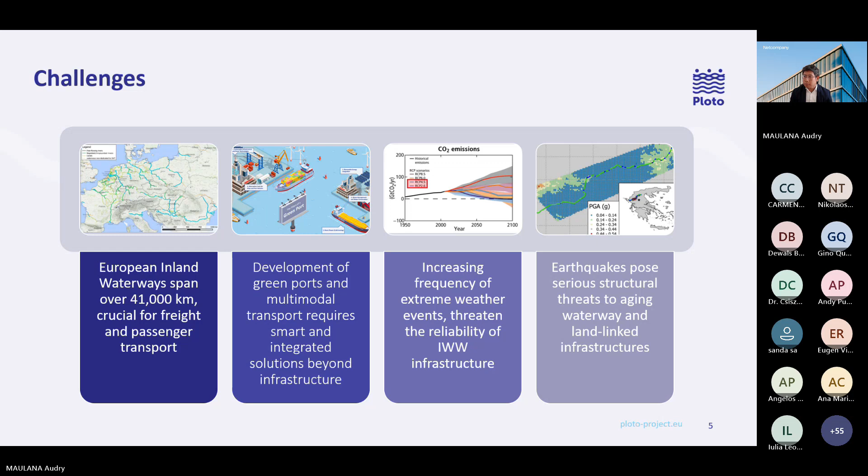Based on these challenges, we aim to address multi-hazard risk understanding, smart prevention and preparedness, as well as faster, adapted, and efficient response. So we develop a new integrated system to support operational and strategic adaptation and mitigation measures by better absorbing and efficiently recovering from climate change impacts.

The overall goal of the project is also to increase the resilience of inland waterways. We do this through a specific methodology that we use.

PLOTO is a very much user-driven project. That's why we designed our methodology, designing the pilot activities together with our end user partners. We adopted an agile development and startup mentality, so we're not afraid of breaking things along the way - we learn from our mistakes - and then we produce early prototypes validated with stakeholders in intermediate schedules for continuous amelioration, and we engage an interdisciplinary team of experts.

This is the modular design that PLOTO adopted. Coming from the hazards I mentioned previously, such as drought, flood, or storm, we take a look at our assets, which is the inland waterways, but we also consider the link infrastructure such as railway, highway, and power, and we create a network from these assets.

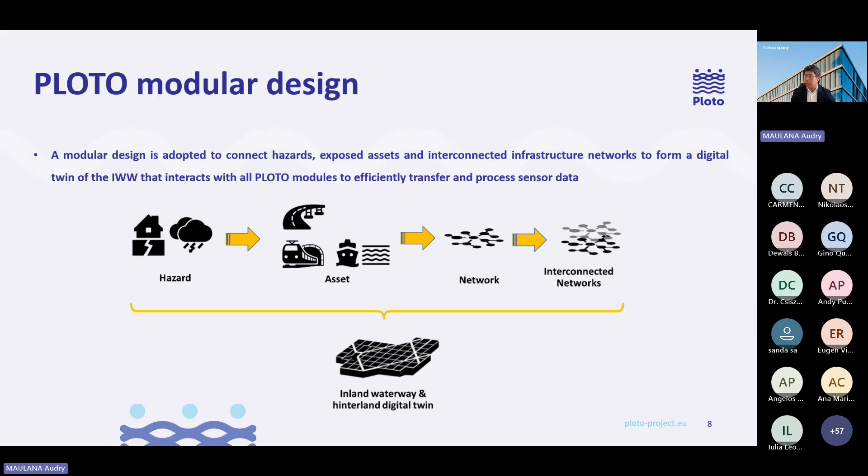I'm not going to go into detail about the methodology of each part of PLOTO - Professor Vamvatsikos will go into more detail in his speech later. But this is basically our methodology of PLOTO. We use a lot of computer vision and machine learning techniques, as well as middleware, data fusion, digital twin, and a common operational picture.

So the use cases and scenarios. I've talked previously about our use cases, but we have 3 use cases in PLOTO. We perform extensive tests in 3 different demo sites - each one has similarities, but also a lot of differences between them.

For example, case study A in the Danube area - this is a collection of smaller ports. It's not just one port, there are about 6 ports in the area, including the waterways and inland ports.

In case study B in Budapest, this is a very interesting case study because it's connected to the railway. This is an inland port and it's connected to the railway.

And then in case study C, in the region of Wallonie in Belgium, this is a very highly urbanized area, in Liège. This is also another type of use case that we want to use as well. We're going to hear more about the case studies in a later section of the webinar.

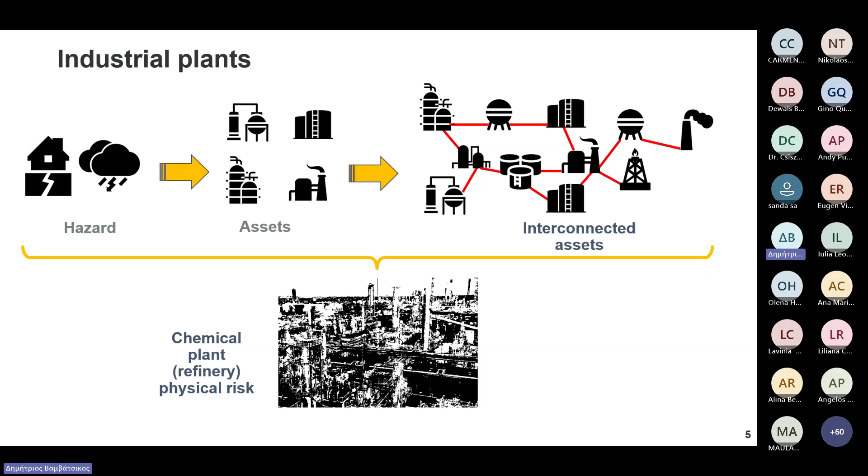Or you can have an industrial plant—again hazards, assets, different types of assets, similarities, dissimilarities. You interconnect them into a system, so you go from asset to system, put them all together, and you get the physical risk of an entire facility.

Same for infrastructure networks. You start from hazard, from assets to network of assets, to interconnection of those in a transportation system. And each time we try to do this, it's a new challenge, a new way of interconnecting, a new way of simulating what will happen.

Because once you simulate it right, you understand what's happening in the system, you understand what's happening in the individual asset, and you can say something that is smart, or at best informed, about what happens, what may happen, and what you can do to prevent this.

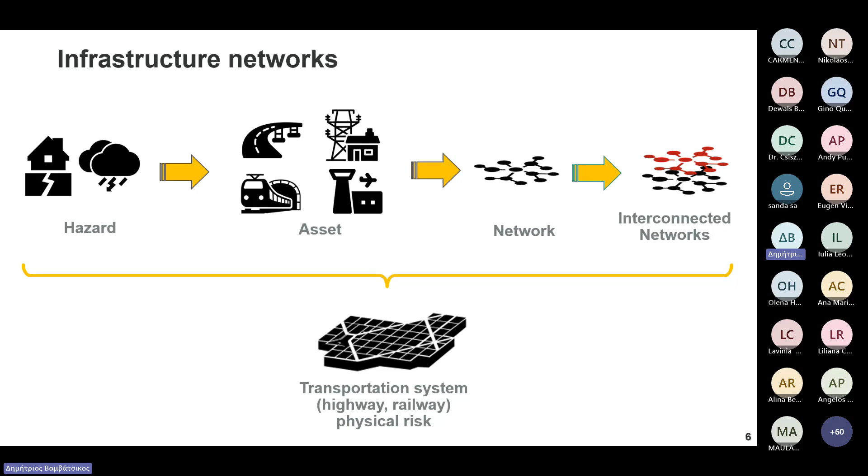Now, how do we handle this in PLOTO? Again, I have to say I'm very happy that the European Union nowadays tells you, guys, try to put these things under common frameworks, try to reuse platforms. In many ways we're using and reusing concepts we're developing and trying to build commonality through them.

You get your assets in a database, you have your hazard records again in a big database. You throw them through a simulation platform, which will give you a series of scenarios—millions of those—of different types of damage. Green is none, black is catastrophic, for every single asset.

Then you go to your stochastic event sets, meaning a scenario generator of natural hazard events. You throw them into a tool that will put all this together, mix them nicely, and give you ideas of system impact from low to high to moderate, both at the asset level and at the entire system level. And that's the big innovation there.

Now, introducing to the system—the so-called all-scenario long-term assessment—the concept of sensors, meaning where do you feel the pain? In terminology that makes sense to our hazard people, that's nowcasting and forecasting: what is happening right now, nowcasting, and what may happen in the future, forecasting. Different levels of uncertainty in each, but they're all handled in the same way, as I'll show later.

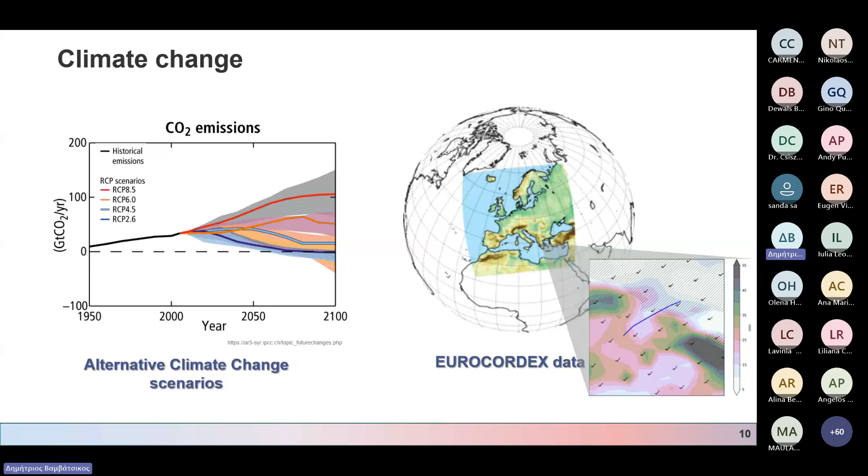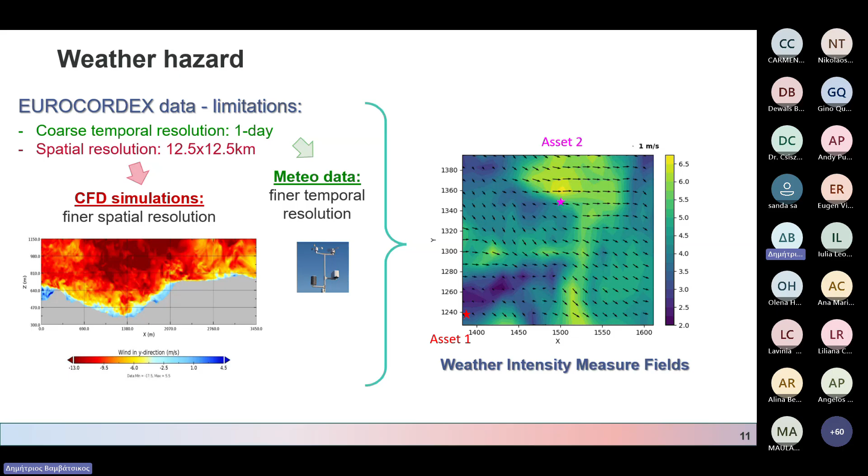What can be inputs to those? What kind of scenarios can we be talking about? Well, climate change, alternative climate change scenarios, weather hazard stemming from said scenarios with CFD simulation, with fine spatial resolution, meteorological data, and weather sensors.

You have flood hazard, both simulated and actual measurements, let's say from water gauge sensors. You have earthquake hazard from seismographs, and in this case simulated sets. On the right, you're seeing what we call stochastic event sets, meaning, in this case for Romania, all sets of potential events, earthquakes that can happen, but darker and worse.

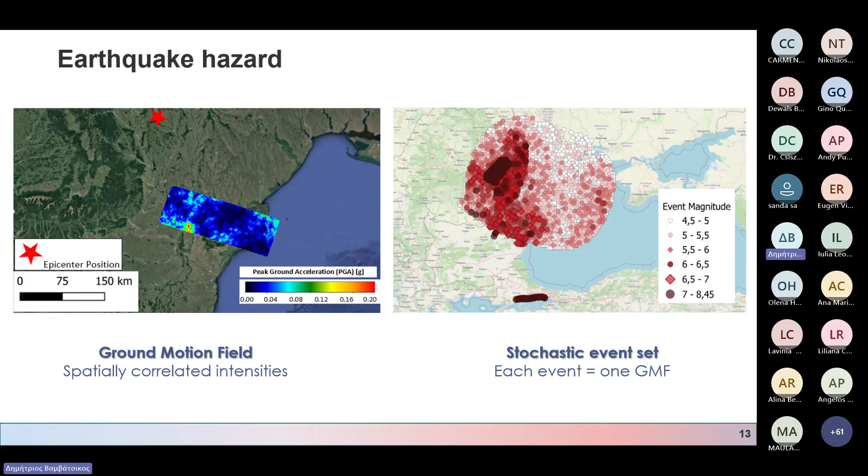On the left, you see a realization of exactly such an event over the lower Danube, the PLOTO case study for Romania. Whatever is darker is lower; whatever gets hot, red, that's going to worsen, which can tell you automatically along a long area, almost 100 kilometers, what is the expected level of damage.

Put this all together: intensity measures, exposure model of assets, vulnerability function, analyzing to get losses, loss curves aggregated, and maps to show you the spatial correlation for every type of hazard. Once you have this information stored in the PLOTO system, you can now do predictions and understanding of what's happening.

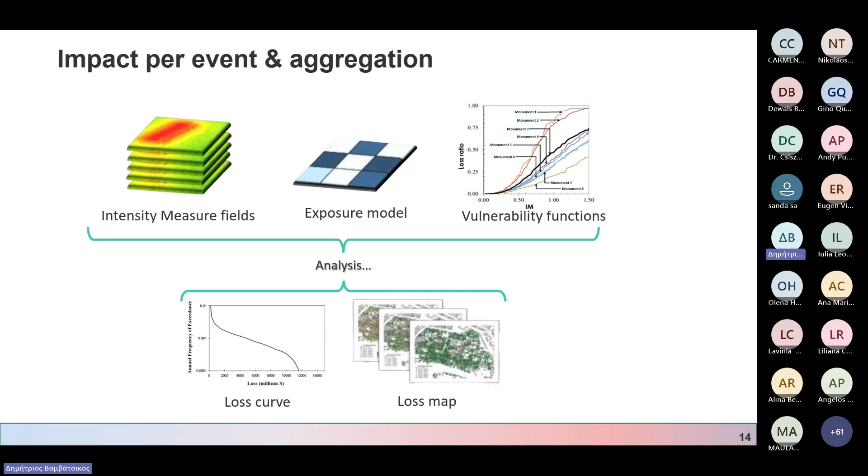Let's give you some ideas of, based on this framework, how PLOTO has innovated and introduced such concepts into something well packaged, integrated, a single point of entry that can make sense. And here is the basic, no-nonsense point of entry.

It's the so-called integrated IMS, common operational picture of the inland waterway assessment tool platform. Here you can collect all this information, query this database, and see, for example, inundation losses, histograms of flood heights, historical data. You can browse all the scenarios and read sensor information and forecasts.

Here's an example of how, I believe, this is the lower Danube looks. From the top, you can see the different assets you have, the different sensors, and you can zoom in and click on each one.

You can even, if you're interested, set standard operating procedures, have resources, dispatch police, fire brigade, and have even a list of actions that every single time something happens, you can call up. You can have alerts set up, and a list of things to do to make sure you don't miss anything.

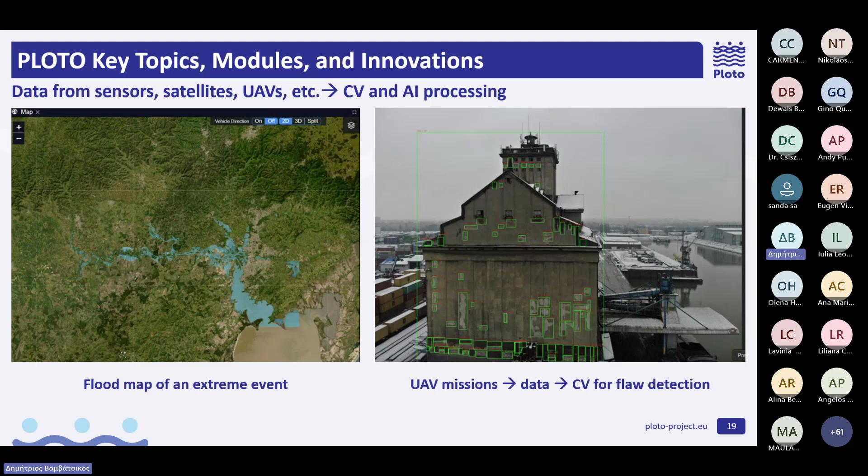In this case, this is the Budapest port. It's a single building at the center of it. You have forecasting information, specifically for the flood assessment using precipitation forecasting, machine learning predictions to facilitate the flow.

Here's how much it rains; over there is how much of the water level you're expecting. You have hydraulic models that give you the potential inundation.

In this case, you see this in Wallonia, the potential inundation of the adjacent urban area, given that the breach has happened. You can even estimate and have pre-run scenarios of which assets have been flooded, by how much, and what is the expected level of damage and losses in this area.

Obviously, whatever you see red or black is practically complete flooded damage. What you see green is you can even have an estimate of losses—not just 1, 2, 3, 4, 5. We're not talking qualitative estimates here.

We're talking quantitative estimates, because something I forgot to say is all this concept has been set up on the same principles that the insurance and reinsurance industry uses, the so-called catastrophe risk assessment—meaning that even though we use a different basis to introduce sensors, they don't use them. We can feed our information and output hazard and loss products directly into their models, and we can help them provide estimates back, which can be used by system operators and governments, municipalities, to assess, prepare response, and if needed, mitigate appropriately, insuring, going for new products.

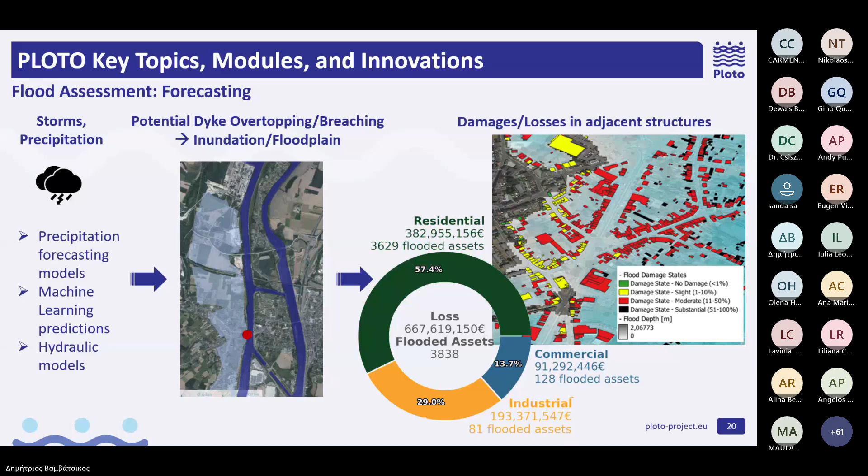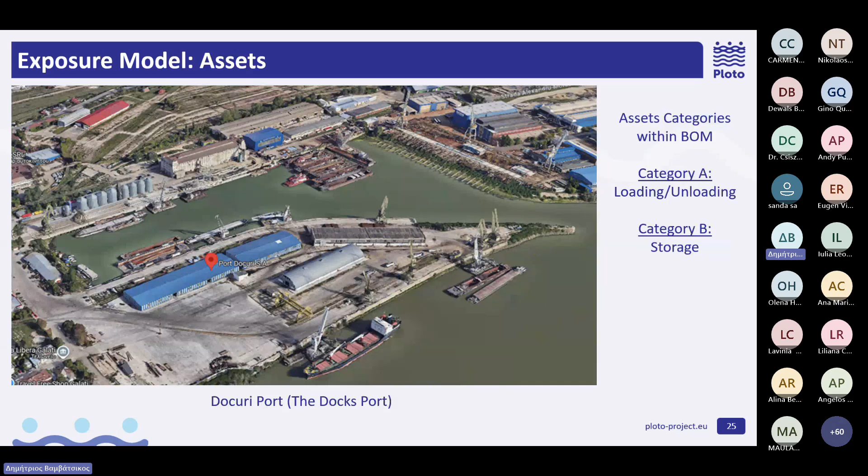And as well, even after you restore functionality, what's the time you need to eliminate the delays, meaning remove your backlog? Here's an example for the Danube basin, and I'm going to show you what Adam has prepared for the inland freight port. Here's an example of one of the ports. In this case it's the docks ports. There's several more of those around. It's not just a simple port in this case.

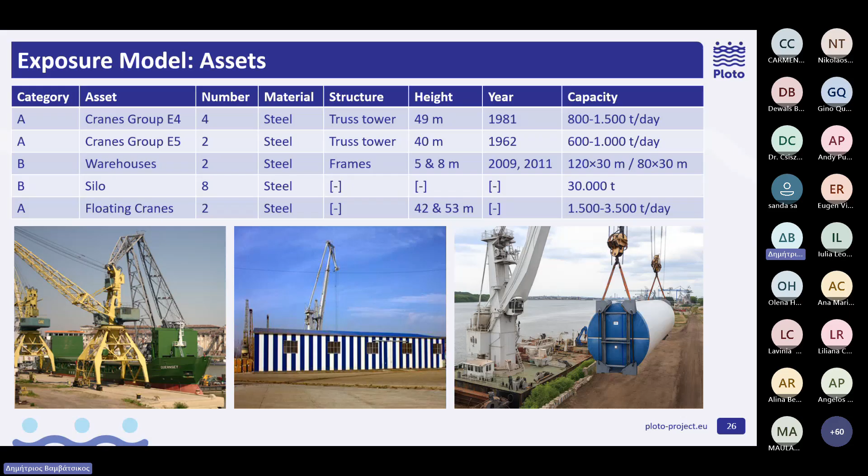And you can see the different cranes that are operational. These are cranes on rails, on the land. They're steel towers, and they handle upwards of 800 to 1,500 tons per day. You get warehouses, you get silos, you get floating cranes, which for the case of earthquake, for example, they're essentially indestructible. Then you have kinds of products that you handle. You have cereals, steel scrap, bulk, and other products. Different changes over the years as COVID went through, as industry changes locally, so the product changes as well.

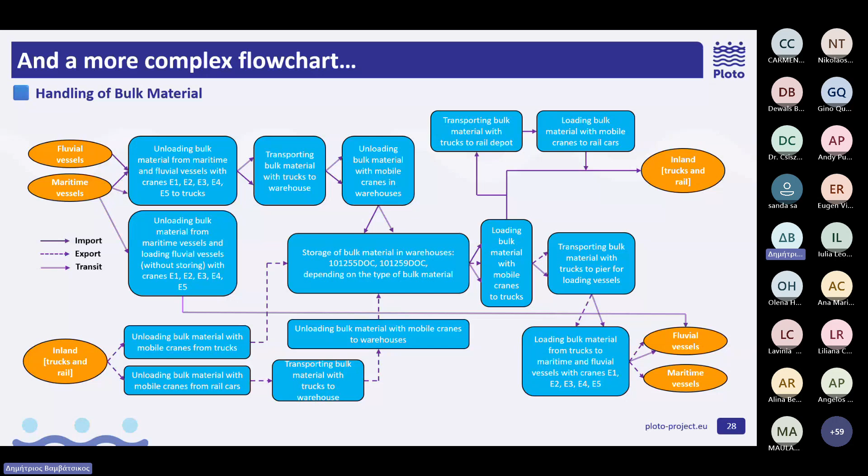And you have some imported, some exported, different cases. Importing goes to inland, can go to waterway, can go to sea or further on the Danube. And you have a certain workflow that you follow based on the operation of the operator's experience. And here is the complete flowchart, which if I really wanted to torture you, I would read through, but let's not do this today.

But the general idea is the following. If you have a disruptive event, let's say a big earthquake, which is quite possible, unfortunately, given the proximity of the Vrancea zone in Romania, which takes out your cranes, your 6 cranes. Then that's day 0. On day 35, 2 of those are back online. Maybe you fix the rails. Maybe you fix the electrical problems. Maybe you fix the wiring. You go to functionality of 33%. You jump up in terms of product handling capability. Then you restore another 2. You go to 66%. You restore them all. And after 43 days, you're back online, 100%, no problem.

Well, yes, but it's going to take you time to fix the backlog. So you got the functionality. Now it's time to go back and make sure you have unloaded everything and reloaded everything. And here's an example of results in terms of steel input, steel exported, and steel delays, which, as you probably see, even though you're back online by day 43, it takes you 72 days total to be as business originally happened.

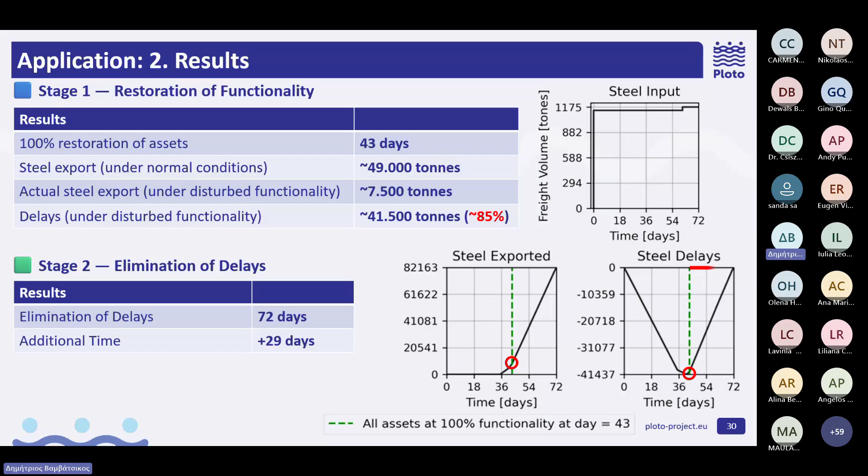Here's an example of how this functions in terms of a functional diagram, and how the flows go from each part of the port to others, and the overall impact analysis with the 72-day restoration period.

I need to conclude with this beautiful example before I say thank you. What you see here is just one part of what we have in the system, meaning the same information is available for all six ports, for Galați, for Budapest, the social economy model for Wallonia. These can operate on their own, they can operate overall, and they give you a full overview, not just a bird's eye overview, but one where you can zoom in and understand what's happening.

Sometimes it's obvious—yes, if you take out a crane, things will slow down. But a lot of it is not. You don't know how much it's going to slow down, or you didn't know how much it would take to restore, or how much it would take to be back to business as usual.

This tool, this intuition that an operator already has, we can turn into something that's quantified. Of course, it has to be compared to ground truth to make sure it's properly calibrated and we're not missing something. Then it can become a powerful tool to help future planning, to help the future of ports, to help people operate in that waterway and its infrastructure in the best possible way. So with that, I thank you.

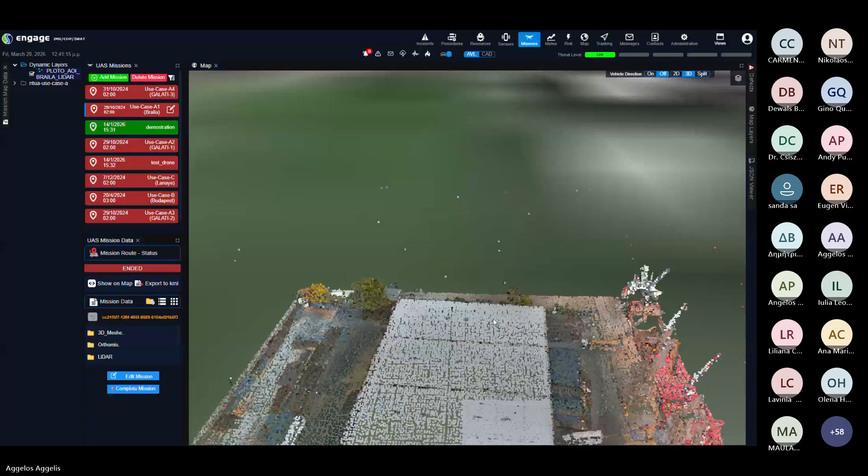Let me give you a brief summary of some examples of data gathered during those flights. Here we have the results, some 3D models for the Galati port, as you can see here. Let's also go to Braila to see some similar models from the port infrastructure. Let's take a quick look. And let's go to Budapest to see some sample data from that use case.

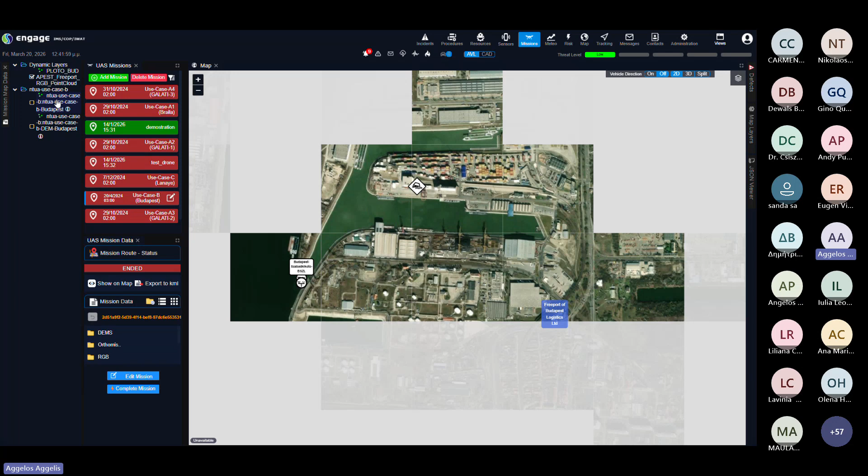Also, 2D data are available after all these flights. For example, here are some images uploaded, overlaid over the map. From this part of the user interface, the operator has full access to all the data collected and uploaded on the platform, and the actual mission of the UAV, which can be shown on the map, downloaded, exported to KML, and uploaded to any UAV the operator needs to use.

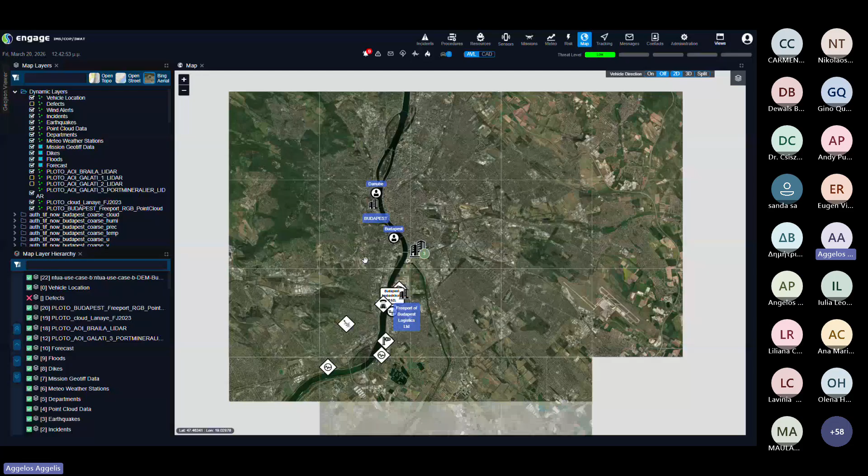All the information gathered and produced by the PLOTO components is available in layers. As you can see here, we have a huge number of layers imported into the platform. If I may enable the defects layer, just to give you a quick description of where's the mission, and what data were gathered regarding the defects—we have a huge data set of defects collected, as you can see, in each port. Different types of defects were recorded, and they are all available on the same platform.

Now let's move on to the risk assessment functionalities. Let me just close the defects layer. Okay.

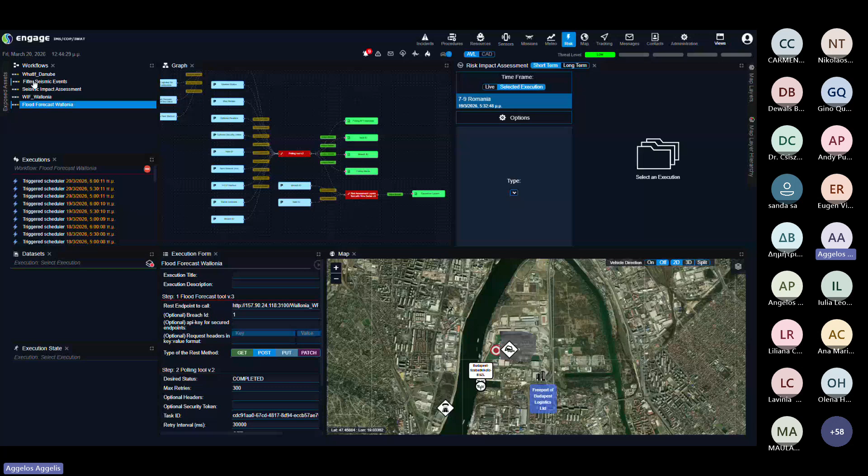Here is the heart of the impact assessment components, with their functionality orchestrated through the PLOTO platform. We have different workflows prepared according to each set of tools collaborating to produce their outcome. Let me start with some quick examples regarding filtering seismic events capabilities.

Here we have huge sets of seismic events that can be filtered out. You can see earthquakes, stochastic earthquakes of different magnitudes, and the operator is able to select any of them and simulate an earthquake.

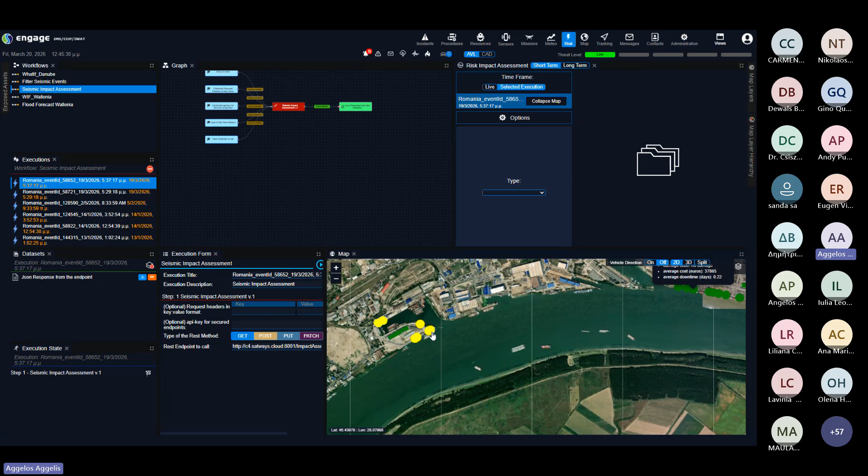When simulating an earthquake, the seismic impact assessment component runs, and its results are available through this component on the user interface. As you can see with the green and yellow dots, the results of the seismic impact assessment are available - either no damage for green assets or slight damage for yellow assets. Depending on each scenario, we have different results.

As you can see, we have some alarms popping up regarding the wind hazard in the area. So this is briefly how the seismic impact assessment is working.

Let's go quickly check some what-if scenarios, mainly for the Wallonia use case. These are some scenarios that are already executed, so I can select various information. Let's start with the layer on the map.

Here you can see the flood extent, and also simultaneously you can see the damage state calculated for the assets that are in the flooded area. Here are also some extra data.

Some more statistical data gathered by the components regarding the possible flood losses. All this information - we are talking about a ton of information available through the platform, and for this use case, you can see some more.

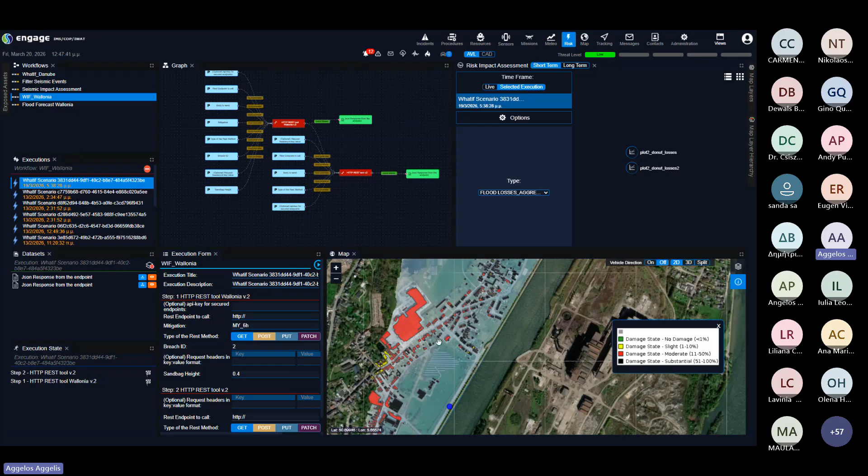The operators are able to run any new what-if scenarios by just selecting any of the breaches simulated in the platform. The sandbag height can be configured, and also the mitigation measures can be configured - whether we have no mitigation measures, or the nearest dam closes at 6 hours or 11 hours. All these different options create different scenarios with different results.

Let's go quickly check also some results from the flood forecast for the Wallonia use case. Okay, I have some issues here. Let me... okay, this is okay. So... okay, something is broken here.

Let's go to the what-if scenarios in the Danube area. Here are the different data produced by the latest run of the what-if scenario for the Danube area.

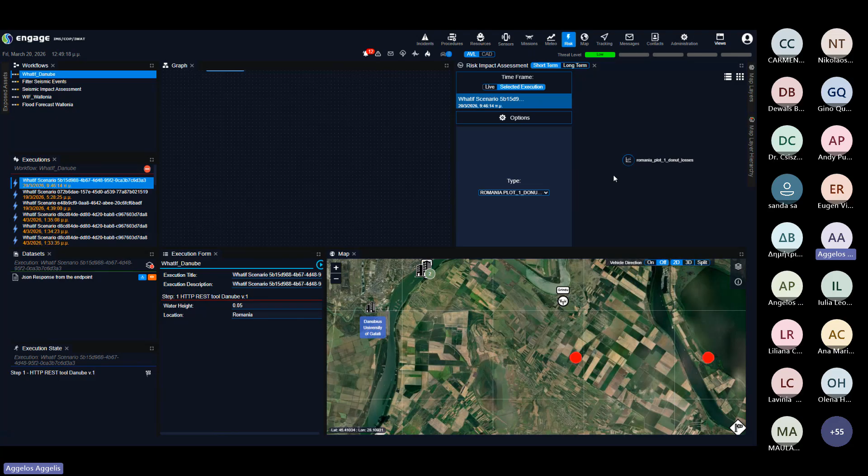As you can see, we have the flooding aggregate direct losses calculated here for each port. Let's take a quick look at Braila, and see if we can find Braila on the map.

You can also spot on the map the weather stations available and the live weather data produced. So here, as you can see, the previous layer is also activated.

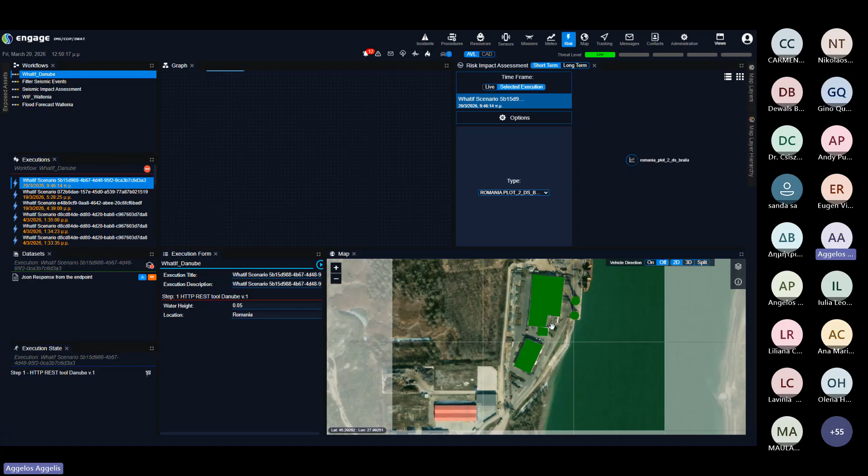Let me just refresh the page to make it quick and go to that what-if scenario and select the execution. Let's go to Braila.

Let's take a quick look at other data available. No losses here.

This is the general state estimated for all the different assets in different places around the Danube in the Romania area.

And I need to find here Galati, if I remember correctly. Here are the assets covered, and we can see all the information collected for each asset.

I don't know how much time I have. I hope that I have some more time. Audrey? Yes, yes, you still have... okay, around 10 minutes. Okay, perfect. Okay, great.

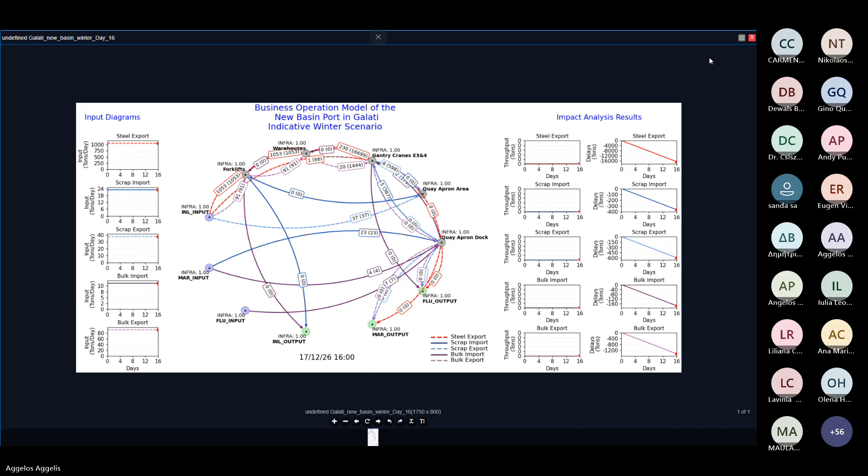Let me just show how the respective what-if scenario for the Danube area is handled, as we have a different workflow here from what we did for Wallonia.

Here the operator just selects the water height estimated and the flood duration in days. Selecting all these different options, we can simulate a new what-if scenario. Here you can see a list of the latest scenarios executed per category.

In this view, you can see all the components collaborating for each workflow in order to produce their final outcome. When we have an actual incident in the infrastructure, the incident management is used by the operators. Through this, the operators can create new incidents by filling in all the information regarding the primary type and secondary type of the incident taking place.

While managing the whole incident, we have chat capabilities for all users of the platform to exchange information. This is about the common operational picture, as all users, according to the department and organization they belong to, can share the information gathered for that incident. In case we are able to mobilize resources, we have an example of two cars involved in the incident.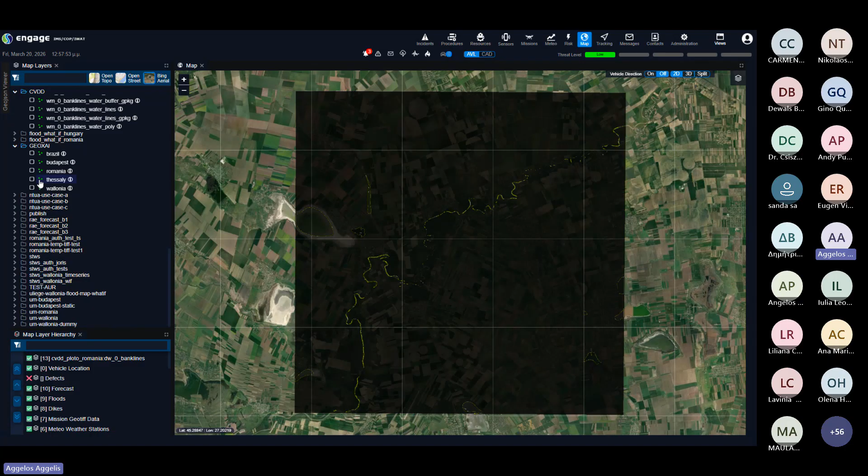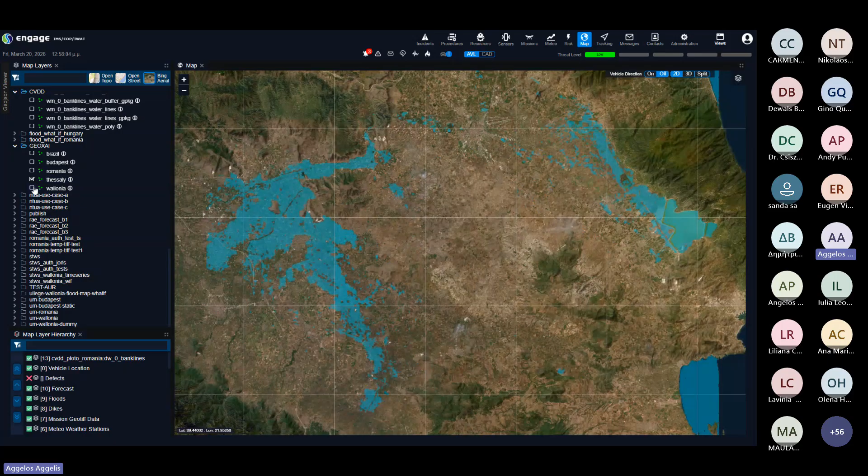So let's take a quick look at some sample data from the floods in Thessaly that were used for testing purposes. All this information is embedded into the system. As you can see, these are the layers for Wallonia. I think there is also an example of an actual flood in Brazil, where the data were used for testing purposes.

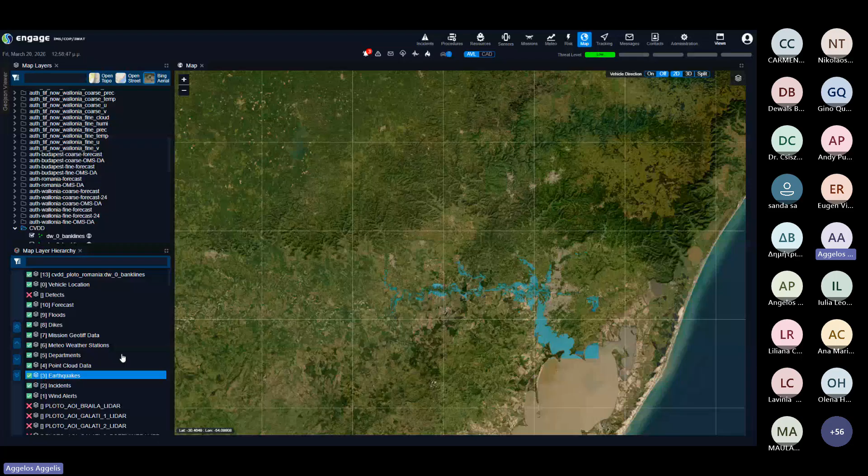Yes, here it is. We have implemented a subset of typical GIS functionality in order to manage those layers and give operators the capability to overlay layers one over the other. Resources management — all the resources available in the platform are documented and managed through the platform.

So these are, let me say, the most basic functionalities offered through the PLOTO platform for managing any incident or alarm from the sensors, and also capabilities regarding impact assessment on the infrastructure according to the hazard we are facing.

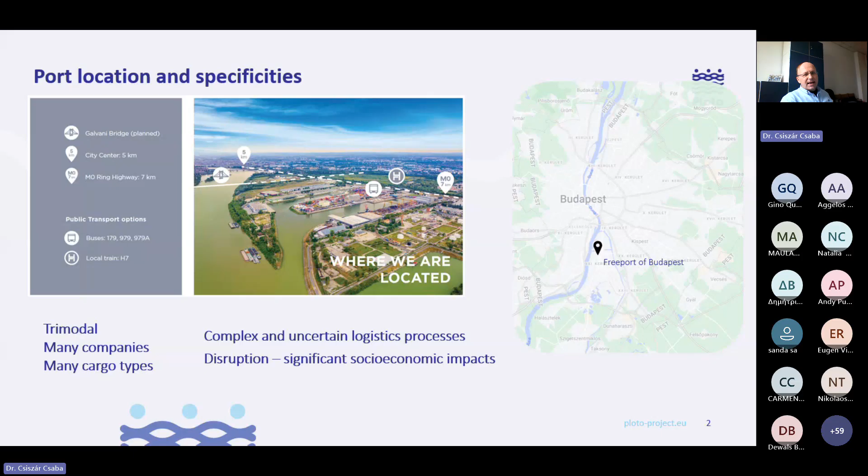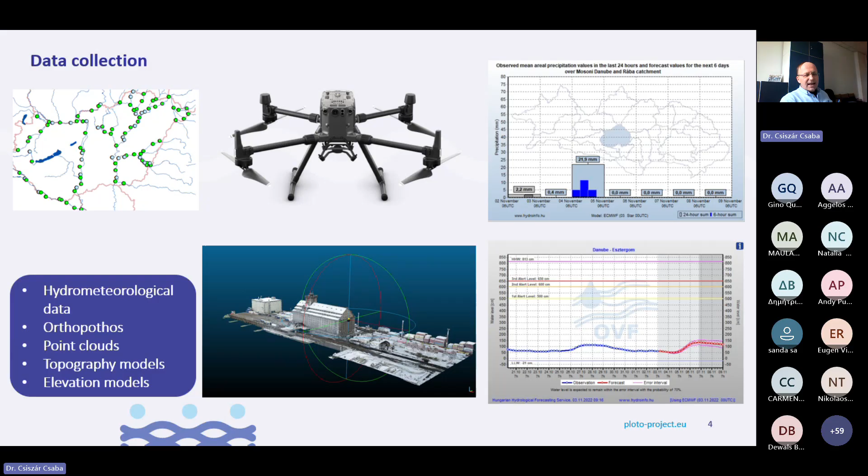So that was the introduction. What has been done here? Very briefly, some sensors were installed at appropriate locations to provide continuous data, and we used existing sensors as well for nowcast and forecast purposes. Besides that, data collection was done by MÁV colleagues. Many different data collection technologies were applied in the first period in order to describe the assets and collect as many attributes as relevant for the predictions. Here you see the list of different types of data — hydrometeorological data provided by RSOE, orthophotos, point clouds, elevation models, and so on, to feed into the PLOTO system.

And let's focus on the main outcomes. First of all, we begin with the user requirements, and many companies were contacted here in Hungary, and in Romania and in Wallonia as well.

Then the multimodal logistic chains were described. It was a kind of challenge because, as I mentioned, many types of cargoes, many different kinds of activities, storage activities, loading, unloading, and there are, of course, capacity constraints. So that's why the delays should be revealed in order to mitigate the delays.

The hazards. Here, the earthquake was not relevant, but the strong wind, the severe storms, floods, and ice situations were the most important hazards. And we created vulnerability and recoverability indices in order to describe the

issues. Users. For dispatchers, who are the main users of the PLOTO system, but beside them, the companies also have the opportunity to use the system, and the transport service providers, the shipping companies, the railway companies, and so on.

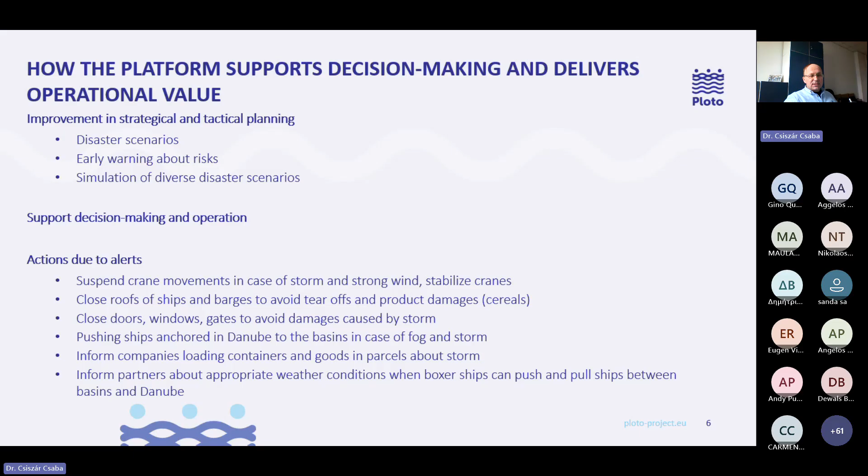The challenges were that many companies provided data, and data were coming from different sources in different formats and with different information content, because they're using fragmented information systems, and the structure and the content were different.

Our task was to understand the processes, to describe the processes, to collect or to estimate appropriate data sets which can be inputted into the system. So the quantitative and qualitative description was a task, and in this sense, the BSL colleagues helped a lot, because they have experience in the everyday operation.

Some lessons learned. The water level is a critical issue because the drought periods are longer and longer year by year. In this case, the port and the operator should find alternative routes and estimate the delays and inform the partners. So this is a kind of lesson learned.

And some words about the platform. A platform has a modular architecture, so it can be used in other geographical contexts as well. Many data sources can be used, and the Budapest use case provided or tried to provide these data sets, either publicly available data sets or direct operational and statistical data were provided.

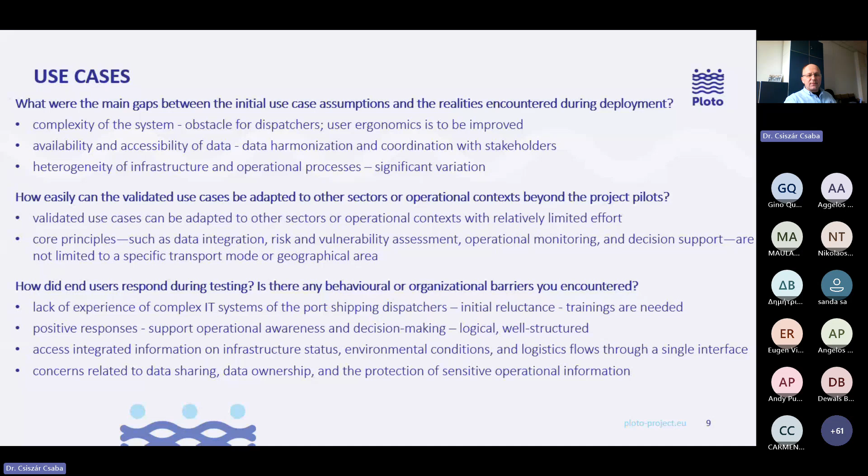This was an overview about the use case, and finally, I would like to show you a video about the use case. Three minutes, and then we can give the floor to the other use case.

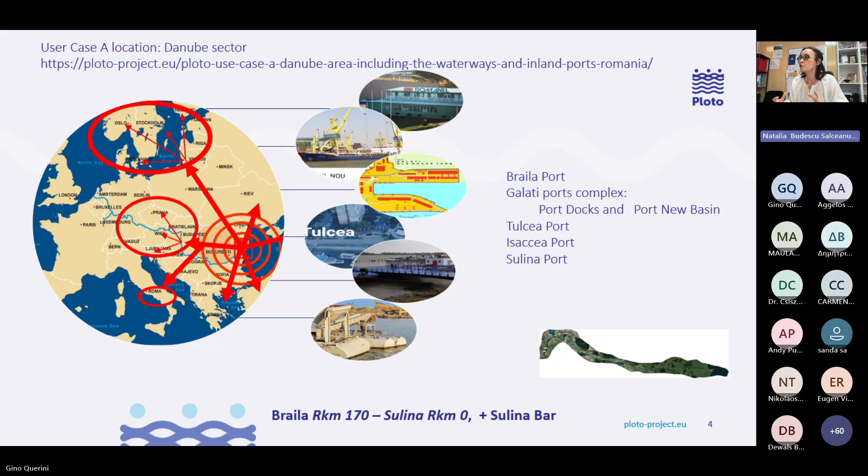So in alphabetical order, we choose the Brăila port. We built a complex of ports in Galați because both of them were very interested to us, so we are not able to choose between Port Docks and New Basin Port. Tulcea Port, Isaccea, and Sulina. The first two, Brăila and Galați Port Complex, are the ones that also have the freight, and the last three are focusing on passengers. So in terms of seeing exactly how different events can impact the activity of the port, the economic value of the businesses taking place in the port, we chose also the one with freight and the one with passengers.

You can see that in the platform, shown before, there are different events identified in terms of drought, flood, and even earthquake if it is the case. For the Romanian use case, putting together all the data you see here in terms of water level, hydrographical data, meteor data, GIS, river, ice coverage if needed during the season, because the project was implemented over a duration of 4 years, we chose flood as being the one that has most impact in terms of use case implementation.

Okay, just a quick view of the ports that we chose. You see here the port of Brăila, the image of the port and also the location. We will go a little bit faster on this.

Galați with the two ports that I mentioned before. Isaccea also. We just have two more: Sulina and Tulcea. Just to have the image, the picture of the ports with all the information in terms of location and activity happening there.

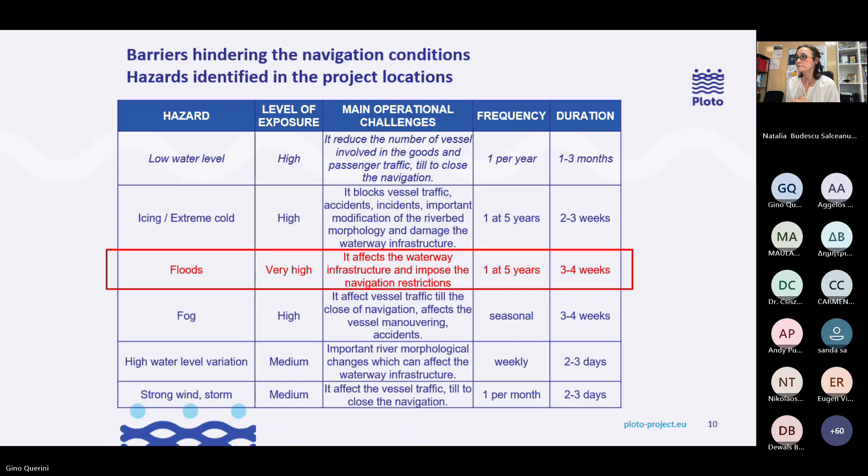This is the type of data. As I spoke before, you saw the scheme. We collect at the level of the consortium, with the help of the stakeholders of the ports that we identified, different types of data over different periods of time in order to build a solid database that will become the entry data for the PLOTO platform.

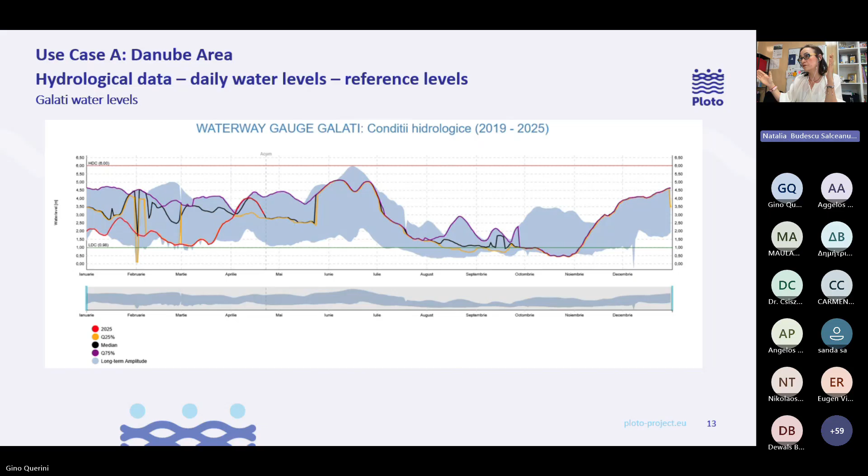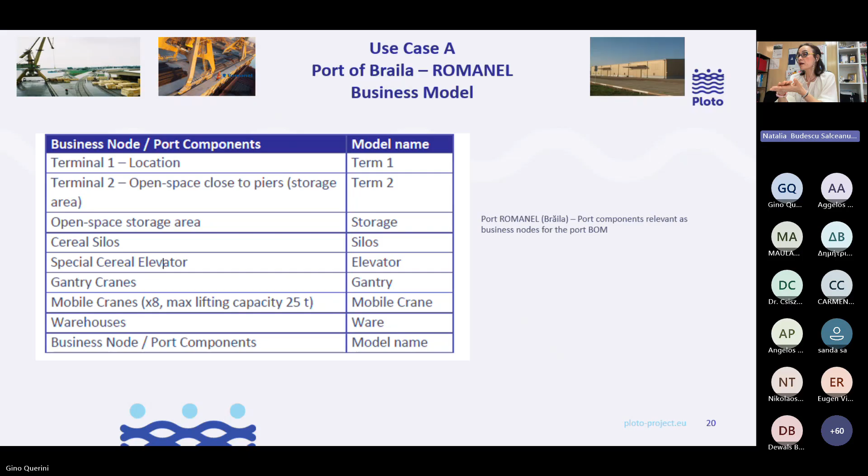We put together the mapping of the components of the port in order to design the business node.

You also saw this at the level of the presentation of my colleagues, because we designed the business operational model in order to be able to exactly say what is going to happen if an event like a flood is in place or is forecast to be in place. So the mitigation measures can be transformed into financial values to be prepared in real time, and also the recovery after the event can be as shortened as possible.

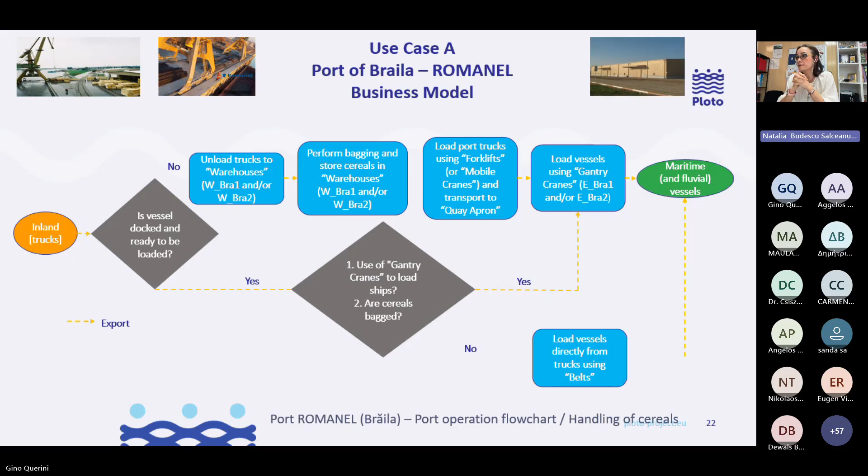Those models are designed taking into consideration different types of cargo. We got into details as much as possible in order to see exactly, after setting all the endowment of the port, the flow of cargo, and exactly how different parts of the business are going to be affected and how this recuperation term can be more advanced, and shortened.

So here you have the bulk material.

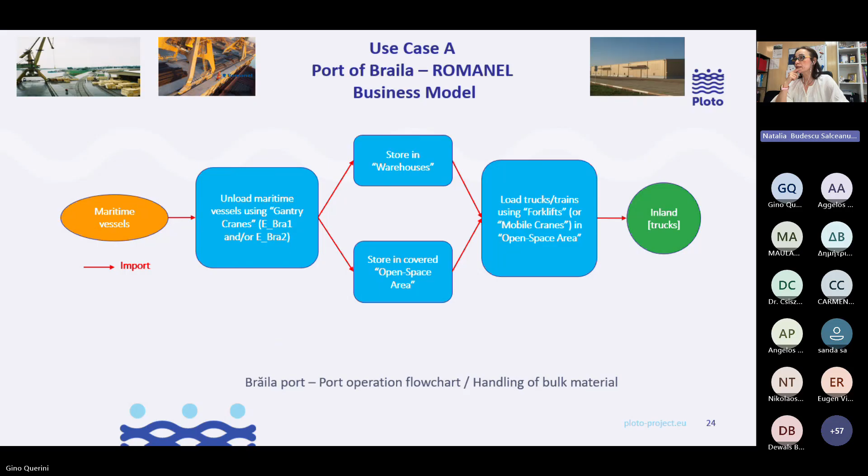We did this for every port. Galați was special, both because it's a maritime and fluvial node, and because we put together the information from two ports in order to see exactly how a more complex business model operates.

You can see the information, and right now the mapping of the facilities and the assets of both ports.

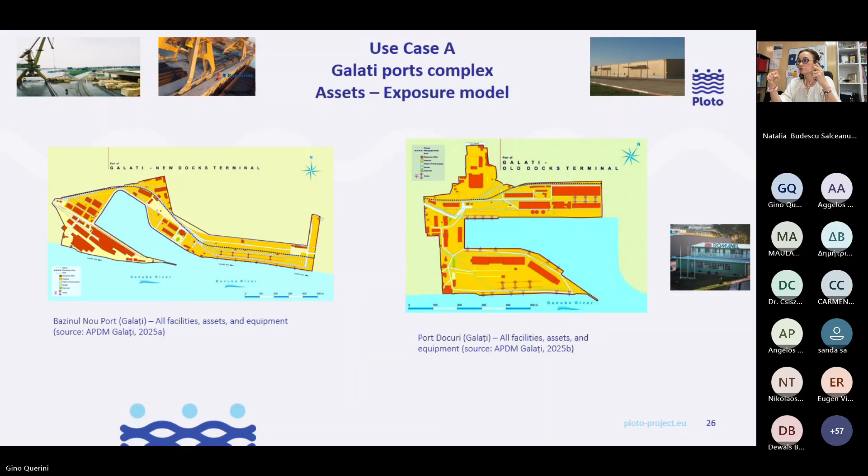You see the information in terms of assets from APDM Galați for both ports.

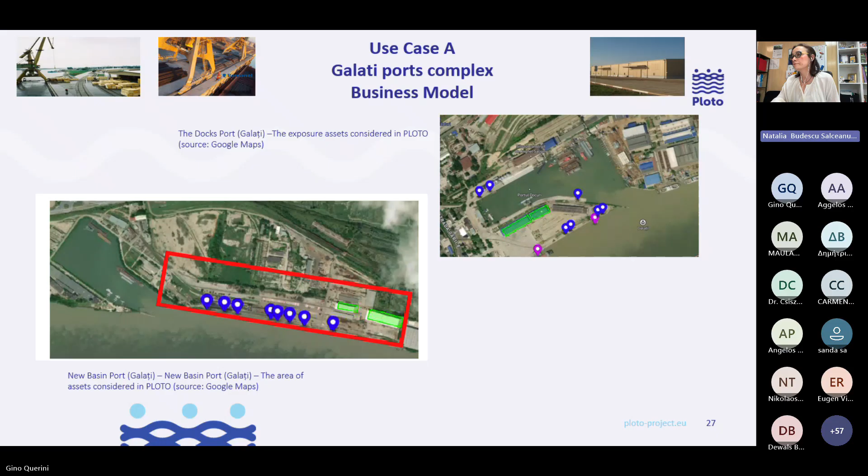Right now we are going to the juicy stuff, getting exactly to see the handling, meaning what is the operational model for different types of cargo. Right now you can see it for bulk materials and products.

You can see it also for stone, timber, iron, and other types of cargo.

Handling of cereals, and handling of scrap.

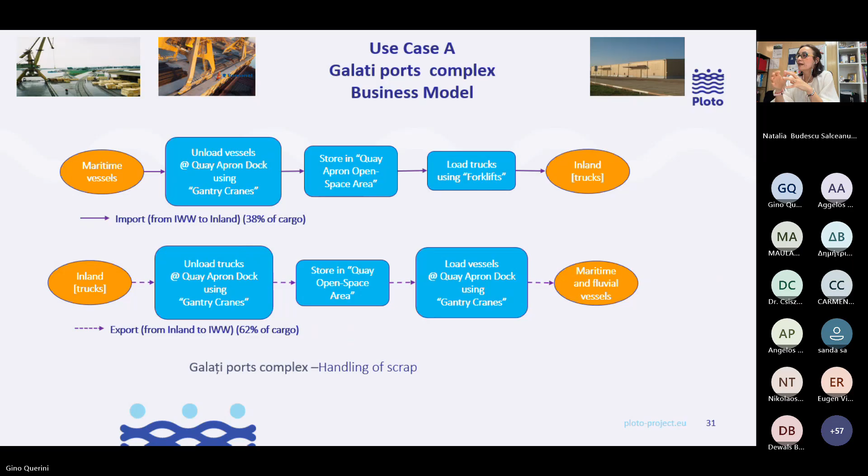So you saw a bit of the dynamics of the cargo and the type of cargo happening at the level of the complex, and how it's going to affect the activity in the port. Right now we are going to a smaller port, that is Isaccea, which is a smaller port in terms of, okay, there is passenger traffic there, but taking into consideration the geopolitical environment, it will gain more and more support, structure, and different facilities.

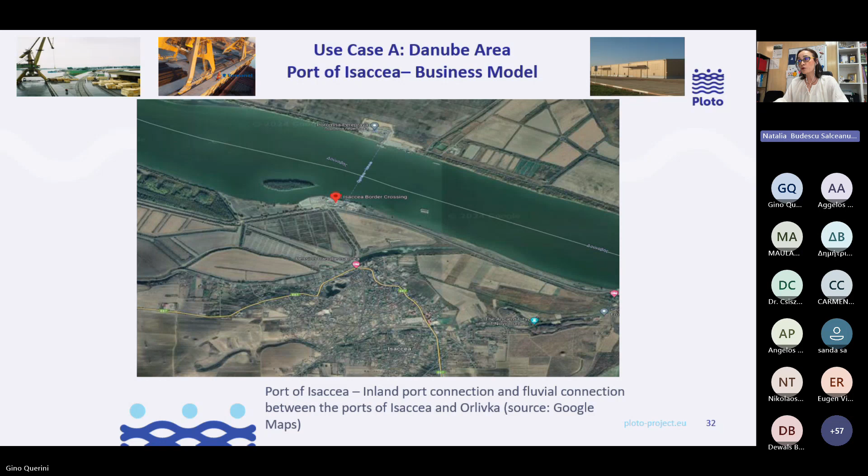So you can see the images of the port.

You can also see the terminal that is there, making the connection with the cross ferry from Ukraine.

Right now, the operational flow chart, as it is in place with the passengers. It was also a discussion taken into consideration because the operational activity of the port increased starting with the war in Ukraine. If it's the case for the port activities to be widened in different areas, this is an open discussion, and we are very keen to see how it's going to be developed.

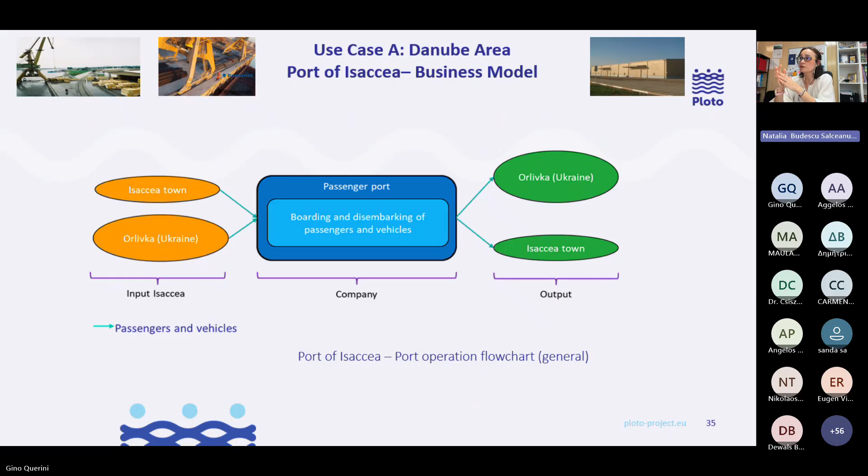You can see also the correlation with the other port from Ukraine.

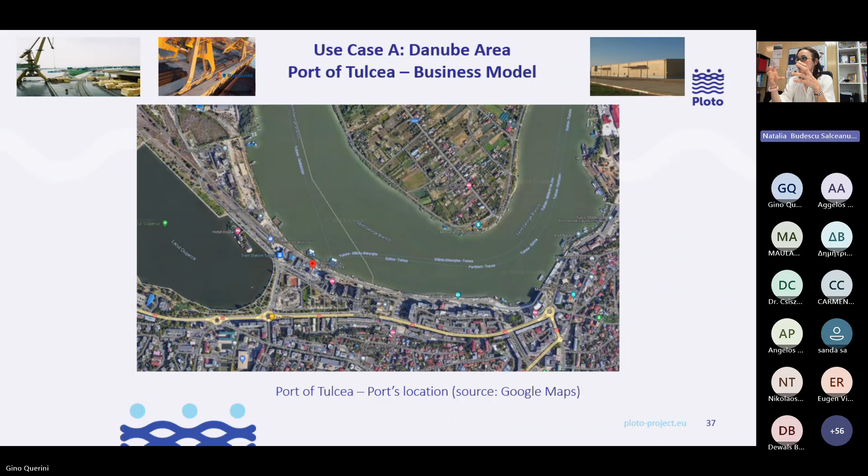The port of Tulcea, which is a touristic port per se, and you are going to see a dynamic that is comparable to Isaccea, but has something that is specific.

There are different images shown here.

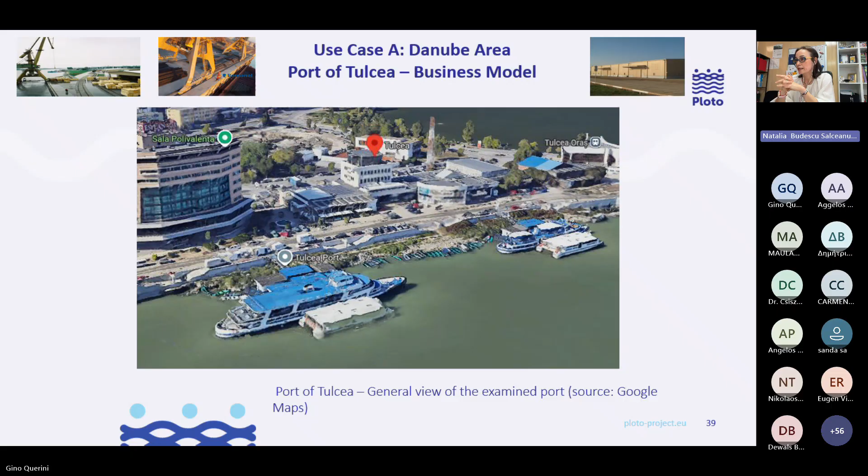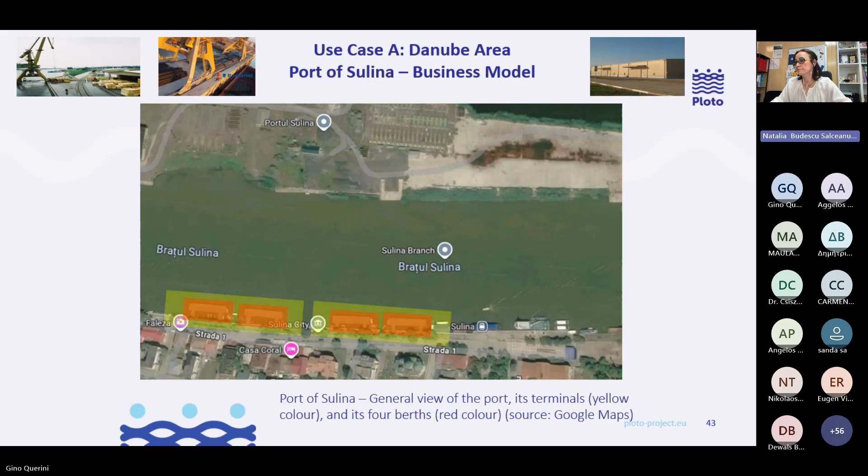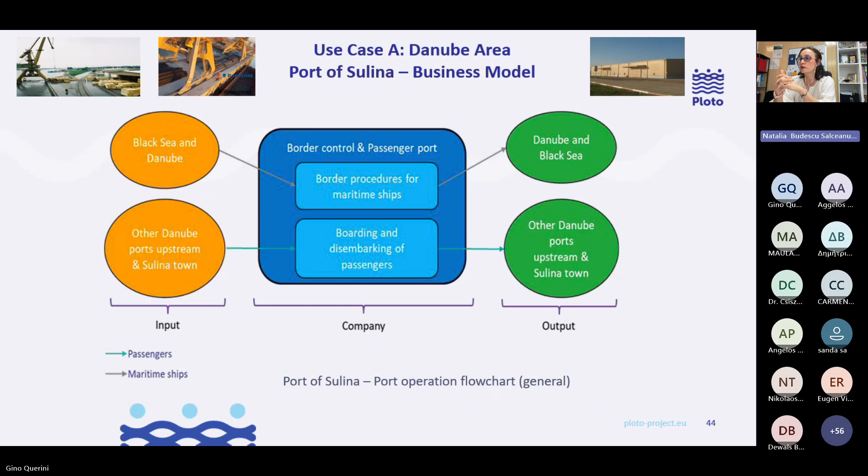Different types of information, having focused also on the passenger traffic. Thank you, next one. Border control. Next one, thank you.

What we learned when we did that is, first, we are able to create, meaning that the platform is agile, is flexible. We are able to create the worst scenarios ever that have a very small percentage of being able to be implemented in real life. But we had some room to play, so to speak.

At the same time, we understood the fact that putting all this data in a platform that is acting like an open source and can be disseminated at the level of all the stakeholders - meaning the port authority, the port operator, or different other entities doing business in the port - it's something very refreshing nowadays, and it's creating a space for them not only to see the information in real time, but also to interact when they see this type of movement.

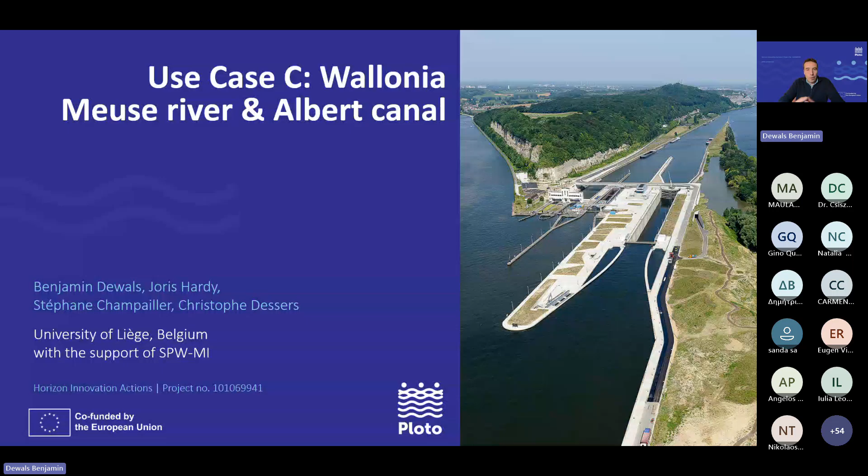So I'm going to say a few words about this use case, which is located in the Walloon region in Belgium. I will briefly introduce what has been done, what is available on this PLOTO platform, and also which is the practical value of that.

So we are interested in an area which is located within the Meuse basin. The basin of River Meuse crosses several countries, including France, Belgium. Part of the basin is in Germany, then the Meuse is in the Netherlands. And we focus especially on a stretch which is located between the city of Liège and the Belgian-Dutch border.

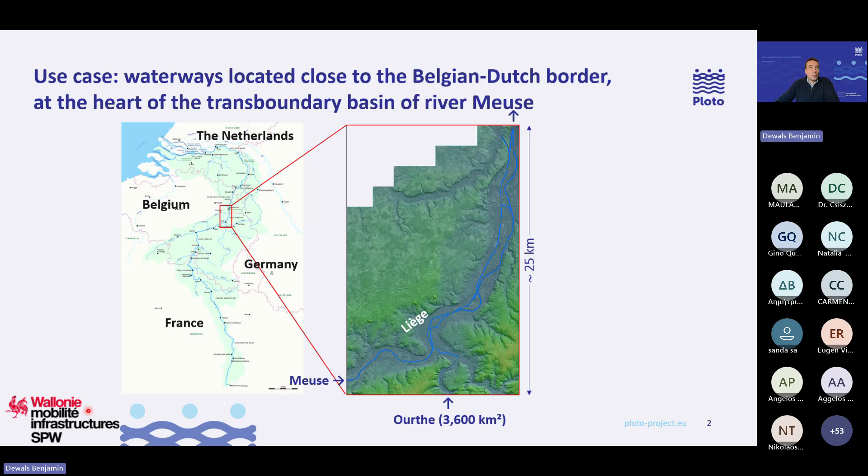The main river is, of course, the Meuse, and those waterways are operated and managed by SPW MI, which is also a full partner of the PLOTO project. The waterways are partly controlled by weirs, one located just downstream of Liège, another further downstream. We will concentrate especially on this artificial channel, called Albert Canal, which connects Liège to the sea harbor of Antwerp.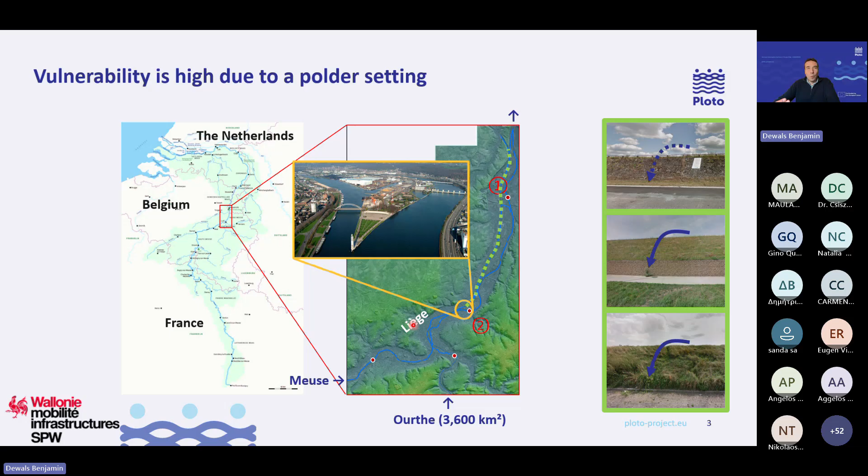This part is of interest related to flood hazards within PLOTO, because there are several locations with dikes of different types and structures, leading to a polder setting, and therefore some more vulnerability in terms of flood risk. It's also a very densely urbanized area with a lot of artificial constructions in the floodplains, and there are numerous critical infrastructures, including for transport, health infrastructure, and other aspects.

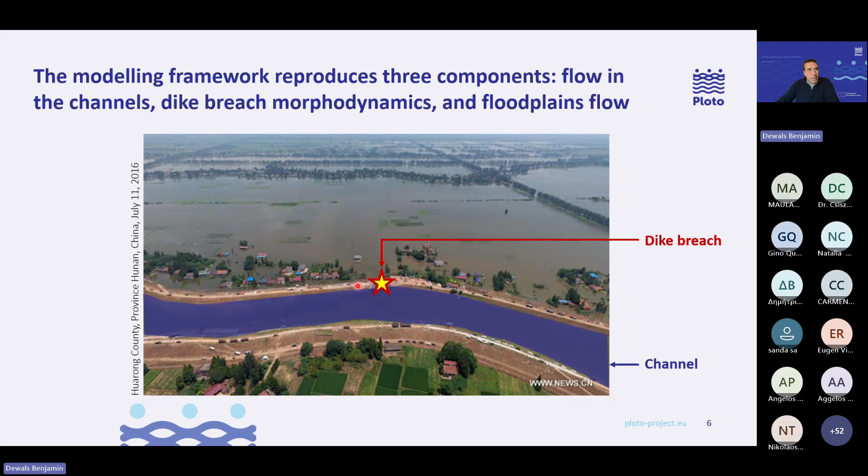So when it comes to including dike breaching in flood forecasts and predictions, there are three components that need to be represented: the channels, the dike breach itself, and the floodplains. This leads to a kind of multi-scale problem, because you have very different characteristic length scales between the floodplains, for instance, and the dike processes themselves.

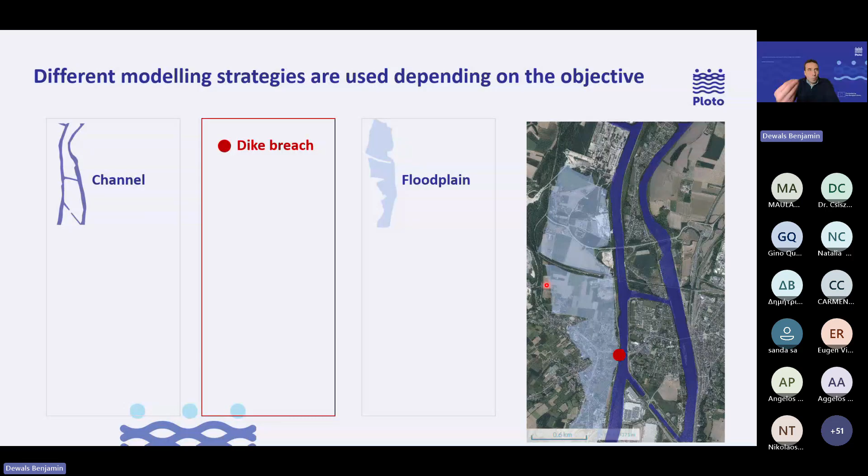Within PLOTO, those three components—the channels, the dikes, and the floodplains—have been represented in a different way, including for the computations, depending on the component of the PLOTO platform. And within the PLOTO platform, as was demonstrated earlier, we have a number of so-called what-if scenarios that were pre-computed, and we also have short-term forecasts which are available.

For the what-if scenarios, we use high-performance computing with a very detailed 2D hydrodynamic model, which is GPU accelerated, computed with our academic model WOLF. This is coupled to a lumped physically-based representation of the dike breaching, and that's again linked to the multi-scale aspect of this problem.

Then when it comes to the short-term forecast, we don't use this very detailed model, which is not feasible in terms of computational cost, but we have efficient, simpler models that were calibrated or derived from the knowledge gained from the detailed 2D model, and are also coupled with the morphodynamic component for the breach. Here you see the coupling is very tight, with shared memory, for instance, between a Python script and the Fortran model.

So let's go first a bit more into the details of those short-term forecasts. How does it work? At the core of those forecasts, which are made available on the PLOTO platform, you have this efficient 1D hydrodynamic model coupled with the dike breaching component. Then it requires boundary conditions, including upstream.

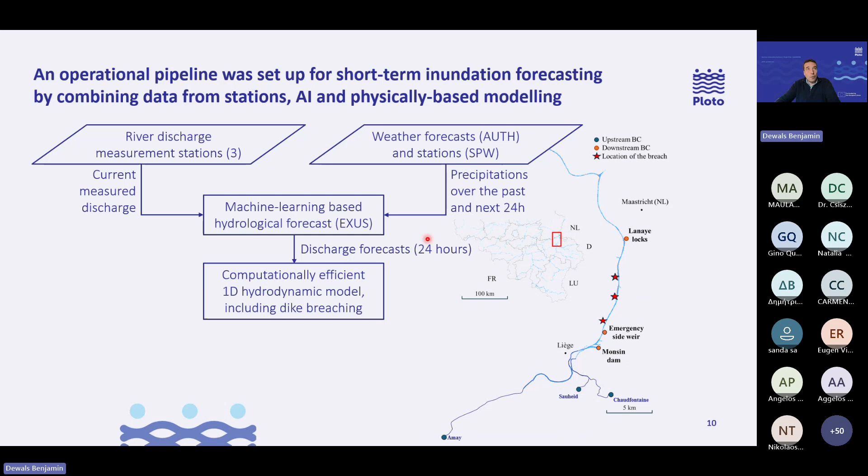For the very operational pipeline on the PLOTO platform, that means for the short-term forecasts, we use a machine learning approach for the hydrological forecast. This machine learning tool is fed by the current river discharge measurements at stations, as shown here, and also by weather observations over the past 24 hours and weather forecasts over the next 24 hours. This is updated every 24 hours, fully operational on the platform.

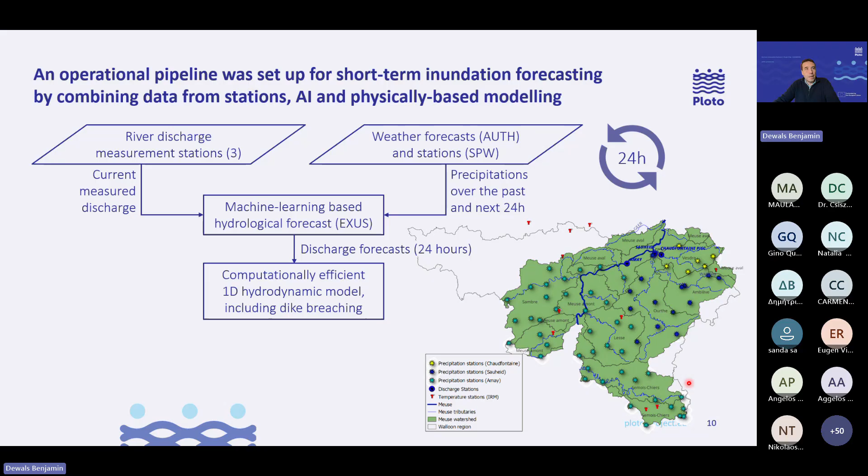That's an overview of the stations which are used. An outcome of this pipeline are the forecasted channel and breach discharge over the next 24 hours, which can be coupled with floodplain topography to have those dynamic inundation maps that were already shown. And again, on the platform, yes, all this is totally operational.

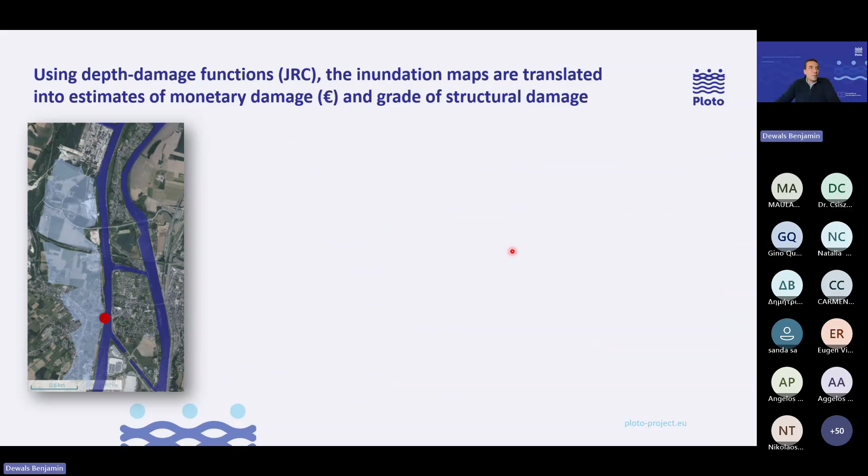On the platform, those inundation maps can be combined with data on exposure, on the building types and locations, and then they can be translated into estimates of monetary damage, and also the degree of structural damage to the buildings.

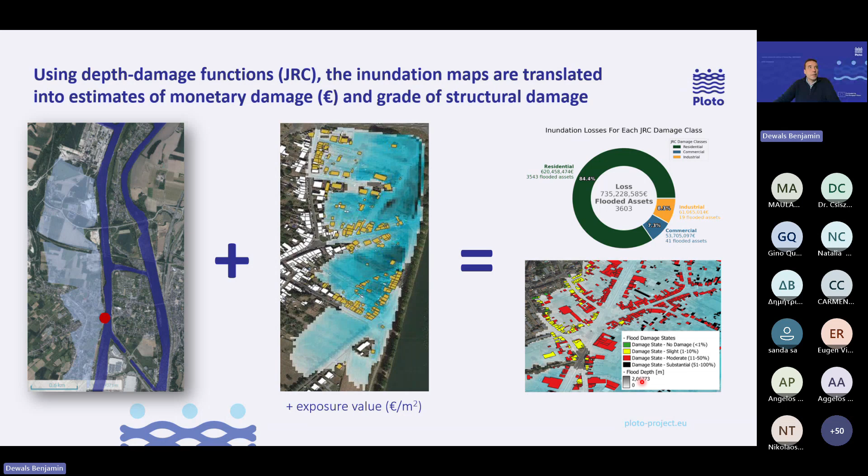That's for the short-term forecasts, which are displayed on the PLOTO platform. You also have those what-if scenarios, pre-computed based on a very detailed model taking a number of options into consideration, providing flood maps with information on inundation depth, but also...

...the time of arrival of the water. If we take a step back, it's very important to highlight that continuously the PLOTO developments have been shared with stakeholders in the region.

Especially, we had a meeting organized by SPWMI, again a partner of the project, in January this year. This meeting was focused on dike breaching, modeling and analysis, and we disseminated the outcomes of PLOTO. There were also other stakeholders present, including the counterpart of SPW on the side of the Flemish region in Belgium, and other research and knowledge institutes.

In terms of practical value of the outcomes of the PLOTO project, you have those flood maps, inundation maps, especially the maps indicating the time of arrival of the flooding, and they can be used in practice by some of the stakeholders like SPW, for emergency planning and crisis preparedness.

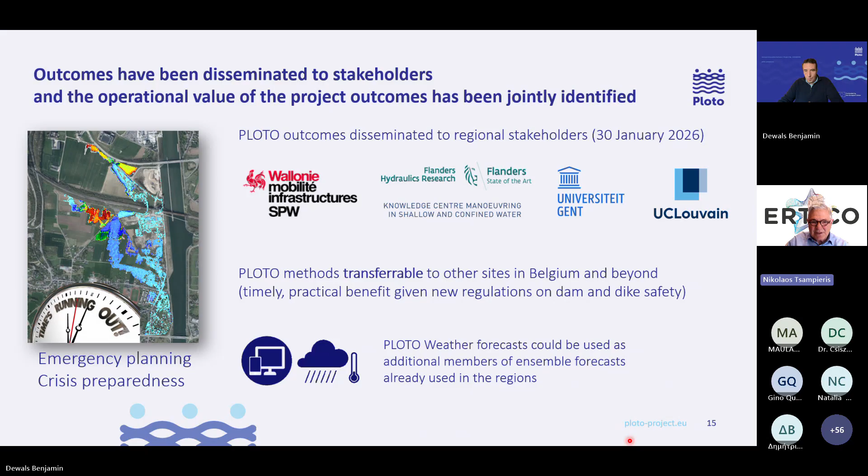But before doing that, I noted that Csiszár put forward some questions in his presentation, and he provided answers as well, that are applicable for the other use cases too. So since you are there and you are on, I would like to ask one of the questions that Csiszár had in his presentation. I took note of what were the main gaps when you had the initial use case assumptions, and then when you try to implement and deploy, the reality is different. So can you identify some main gaps there, dear Benjamin? And the same question, of course, goes for Natalia.

Yes, you are talking about challenges that remain. So one aspect which is important in use case C is this interaction with the dikes and the breaching. For instance, the fragility curves for those dikes—there was not a lot of time to explore them very much in detail. That's a point that could be improved.

I think other challenges for future improvements of the platforms and the procedures include having a more explicit, more transparent communication on the uncertainties. There are many uncertainties that accumulate from the weather forecast, the hydrological components, and other components of the calculations. It would be probably very valuable to make them more explicit in the way we display the results on the platform.